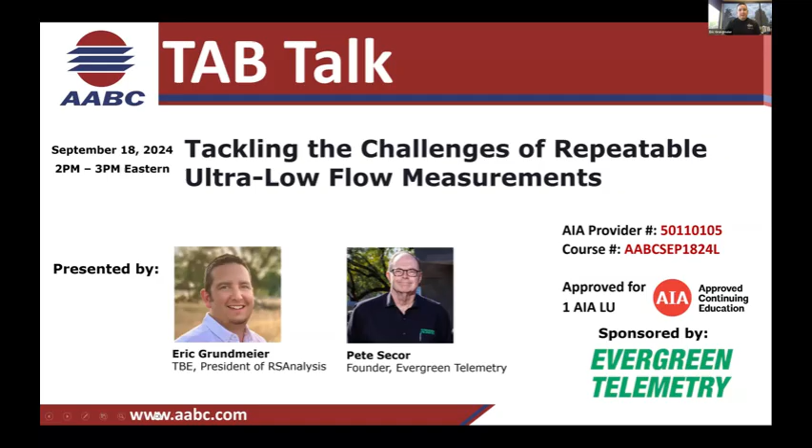We're going to be talking about measuring low flows. We're going to be going over a case study where Pete partnered with RSAnalysis as we were brought into a lawsuit or litigation between a school district and a manufacturer.

We called on Pete to help us out, and this is my first webinar. Right before this, we had a little practice session. One of the things I hear about Pete all the time is that he loves talking test and air balance, loves talking air flows and everything else. And it's true. I had an experience in New York City where we met Brian Sabean. He was the general manager of the Giants, and what a likable guy he was. He just loved talking baseball. And I say that about Pete too. He loves this industry, and it was great to get to chit chat and go over our slides together.

So one of the things that I wanted to bring up in the beginning is that testing low flows is not something new, right? That's something that has been going on in our industry. But I do think that we're seeing an increase in that request, where Pete didn't start updating his technology just because he wanted to; he's actually seeing requests in the industry. Is that right, Pete?

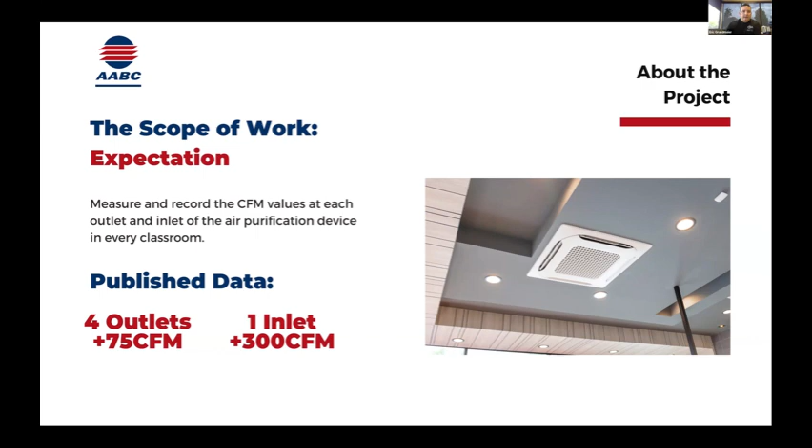So we had this device. As we got the literature back, our expectation at the onset was we were going to be reading somewhere in the realm of 75 CFM per outlet, with a total for the device of 300 CFM. They actually gave us one of these devices and we were able to do some bench testing in our lab. What we quickly realized was the reality was that we weren't getting 75 CFM per outlet. These units were not doing 300 CFM, but much less. The outlet CFMs were all below 10 CFM.

So we were going through some different iterations on how to measure this flow, and we had 600 plus diffusers to read. We created a little 4x4 plenum in which we were trying to read a pitot traverse as we taped it to the ceiling, and it just wasn't working out. So that's where we got Pete involved. He was in the midst of creating the low flow plate and was able to send somebody up here to help us out. Pete, anything you want to add there?

Yeah, it's a very, very difficult challenge when you're getting down underneath 30 CFM, and we'll talk in a minute about how we address that. But it was a very interesting project, and appreciate you calling on us. In the future slides, we'll talk about how we did it.

Yeah, and as we looked into this manufacturer's published data, even achieving this 300 CFM, you were only getting about 2 air exchanges in the classroom. I'm sure a lot of us experienced this throughout the industry during COVID, which really highlighted airflows and IAQ, that there were a lot of manufacturers coming out with all these promises. We know that 2 air exchanges is really next to nothing, and when we got down to the actual measurements, the total for the device was 15 CFM, below 1 air exchange per hour in the room. These things were just not doing much.

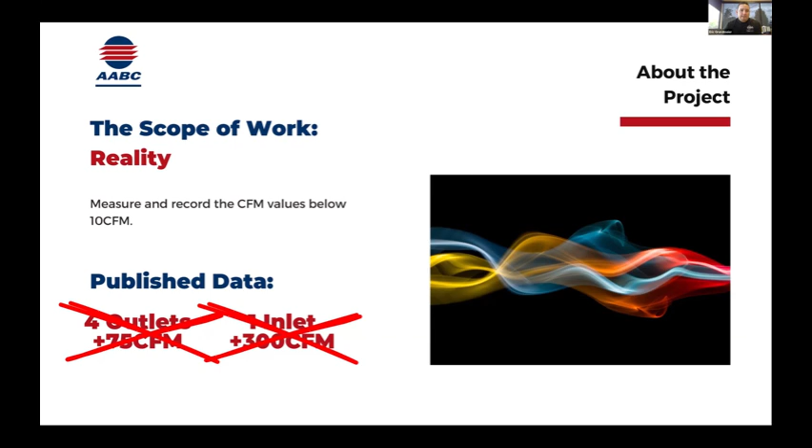So I want to talk about some of the challenges that we faced: challenges with accuracy, and equipment limitations, which Pete's going to touch on. Also environmental sensitivity, when we're asked to measure low flows on package units and outside airs, those environmental impacts, like prevailing winds, can really change how we're measuring. And the last piece of this puzzle, the one I highlighted here, was the repeatability aspect of this project.

And out of all these challenges, that's really the one that we focused in on, because we were basically in the court of law saying, here's our readings, and they have to be repeatable. And that's something across our industry that we really hang our hat on, is that our readings have to be repeatable. So we're getting into these really low flow challenges, and we needed some efficiency in measuring these as well. And that's really where Pete came into light, being able to use his hood and have some repeatability to our methods.

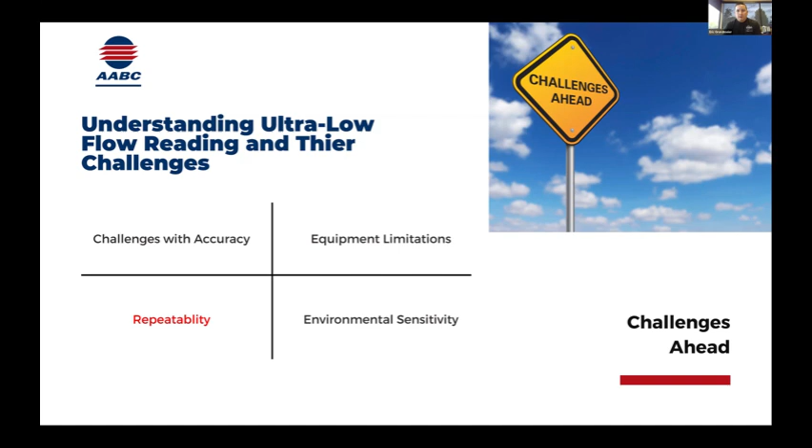And so the repeatability aspect is, we needed consistent results. We needed reliable data and credibility. So having Pete on board here really helped us with our credibility, especially with the mechanical engineer of record that we were working with. And Pete, explain to us some of the challenges with repeatability when it comes to a flow hood, velocities, velocity pressures. So our technology is pressure-based.

We're going to measure velocity based on velocity pressure. When you're talking about low flow, you're talking about low velocity. There's a certain minimum that sensor needs to see in order to get an accurate answer within a reasonable time frame. So as an example, if you're measuring with an airfoil or a pitot tube at about 100 feet a minute, you're looking at a signal that's, in terms of inches of water column, .0006 inches of water column at 100. So somewhere in the range between 75 feet a minute and 100 feet a minute is where you need to be at a minimum in order to get a reliable answer in a few seconds.

If you're lower than that, you can improve your consistency if you measure over a longer period of time. Instead of 2 seconds, try to get to 6 seconds, 8 seconds, or even average 5 readings in a row. If you do that, you'll get consistent results. But that's what you need to do in order to measure low. I've got some actual facts and figures coming in the next few slides.

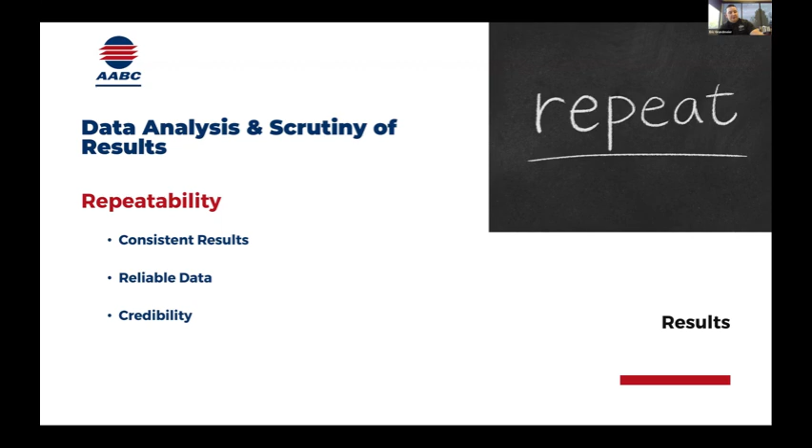Thank you. So here's an example of what Pete was talking about, guys, and this repeatability. Our first attempt with the 8-inch hood, you can see the velocity pressure at which we were trying to read at that time. We are way out there, four zeros, 7.6, trying to read this 7 CFM, and that's just with our devices, with any kind of changes in a system. I mean, this one wasn't changing much, but we do have other places where we see system changes. This one was pretty stable and we were in a stable environment, but still that's just too much for our pressure sensors to try to keep accurate and repeatable.

And then once we got the low flow plate, you can see how our velocity pressures change. So this is where I'll hand it off to Pete to explain more of what he's targeting here. Yeah, what you have to accomplish when the airflow is very, very tiny, in order to measure a minimum velocity pressure, which equates to a minimum velocity, you've got to keep the velocity up over 75 and preferably over 100 feet a minute. At 100 feet a minute, you can measure accurately and consistently in 2 seconds. At 75 feet a minute, you want to take 4 seconds, 6 seconds. You might want to go a little bit longer in order to get consistent results.

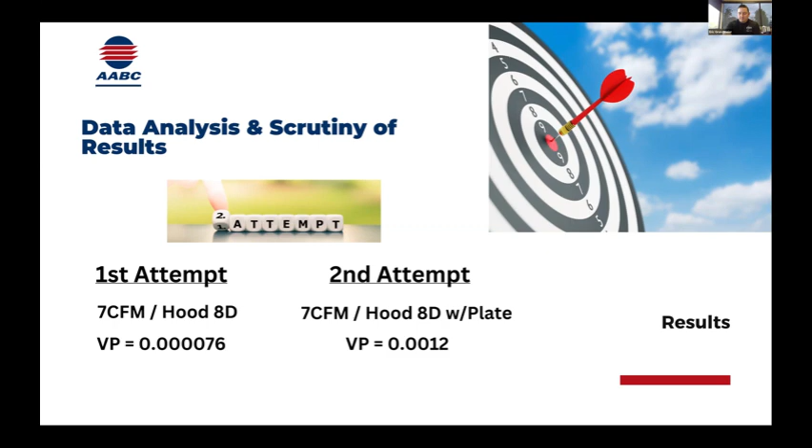Moving on, we got some information from Pete here about what he's developing in his capture hoods. Right. So obviously, CFM, cubic feet per minute, equates to the velocity in feet per minute times the effective area in square feet. So as the airflow in CFM gets lower and lower, the velocity pressure gets lower and lower. So we use a grid arm, and the ability of the grid arm to detect velocity via velocity pressure is very similar. So a lot of people are familiar with, first of all, the pitot tube.

The airfoil does a little bit better job, and the airfoil, the face velocity grid, and the measurement grids that are used in capture hoods all have about the same ability to detect velocity at a particular level relative to the velocity pressure. Foil probes create a certain velocity pressure at a given air velocity. So for instance, at 100 feet a minute for an airfoil type device, you're generating 0.0008 inches of water column. At 75 feet a minute, you're only generating 0.0005.

So the sensor that we use is working pretty hard in those cases, very hard if you're looking at 0.0005. So in order to get down to 30 CFM or 5 CFM, you're going to have to do something different. You're going to have to shrink the area involved. And Eric, if you go to the next slide,

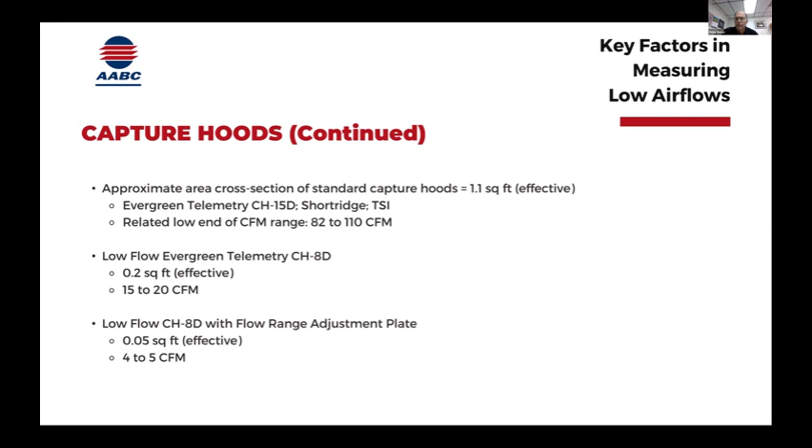Eric, if it's convenient, could you go back to the previous slide about the velocity pressure? I'll talk to that. So we're talking about the grid. There's going to be a certain velocity of air across the measurement grid. The measurement grid is going to provide a velocity pressure to the electronic sensor. Just imagine for a minute that you're at 1,000 feet a minute; you're talking about a pressure that might be 0.1 inches of water column. Certainly it's going to be above 0.01 inches of water column. Super easy to measure, and one that doesn't vary so much.

So think about what's going on in the environment where a TAB technician is doing his job: he's got the system, dampers, VAVs, people moving around in the building, doors opening and closing. When you're at 1,000 feet a minute, the signal is so strong it's relatively unaffected by everything else going on in the building. Without doing anything, in 2 seconds, you're going to get consistent results time after time. But let's imagine you're down at around 100 feet a minute or even less.

What's going on in the system is variation. That grill, you want it to be 100, you think it's 100, it's never 100 consistently. It's always doing 90 one second and 110 the next second, because it's affected by everything else. So the real world is not consistent when you're talking about 100 CFM at a particular grill. The electronics will sense that. It'll accurately tell you that one second you're at 90 feet a minute, the next second you're at 110.

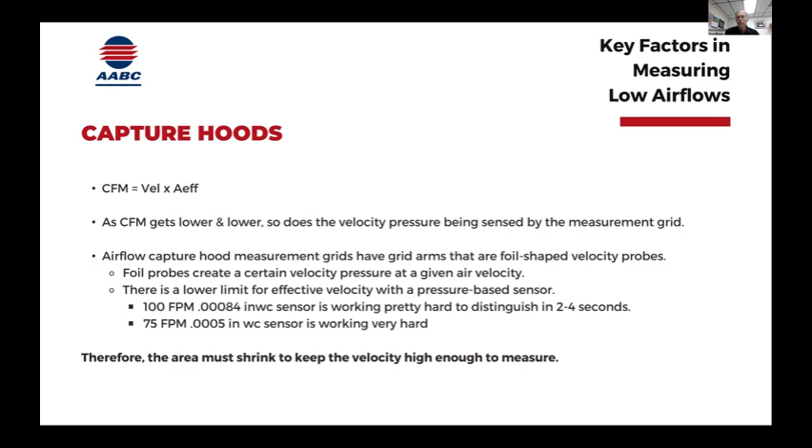And this illustrates, in our industry, having the right tool for the right job, right? Right. We're going to get into more of the application base of low flow testing, but we've all been in the scenario where you have a bunch of bathrooms all at 50 CFM, right? Having that ability to use the right tool for the right job helps you have that repeatability, that credibility that we're talking about. We can go back with that same tool, have the same measurement, which really proves the value which we bring as test and air balance.

Right. Energy efficiency, number one. And number two, a lot of dollars are being provided under the condition that the building is going to be energy efficient. So how much outside air is being brought in? How much air is being provided to a storage closet? What's the exhaust fan in a bathroom doing? More and more people are trying to be very, very accurate on tiny airflow numbers, which wasn't the case 5 years ago.

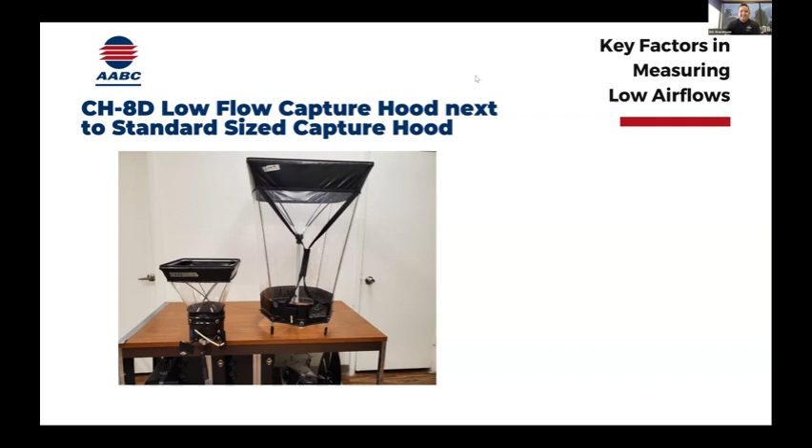But there are situations here and there where an auditor or regulatory authority or whatever wants to see a reliable reading at a very, very tiny CFM. So now, because we did it for you, Eric, we're prepared to do it for others. Back slides here. So this was the example I think you were showing, and then we have a next picture that shows this actually installed. But this is the low flow plate and the 8-inch hood, correct?

So on the left side, that's our standard low flow base with no skirt attached, with an effective cross-sectional area of 0.2 square feet. So at 100 feet a minute, it's 20 CFM. And then the plate next to it reduces that effective area down to 0.05 square feet. When I say effective area, instead of just measuring and calculating the area, what we do is we put the hood on there, and we traverse the duct, and we make sure, let's say that we're pushing 100 CFM through a particular capture hood.

And then we switch the mode over to velocity, and we measure velocity. And then we just take the 100 CFM and divide it by the measured velocity. That gives us the effective opening. Anybody out there can do the same with Shortridge or TSI or ours. You can do it on one of your test ducts. Measure 100, switch the mode to velocity, make the division per the equation there, and you'll come up with the effective area. So you're not trying to figure out what's the open space of these geometries.

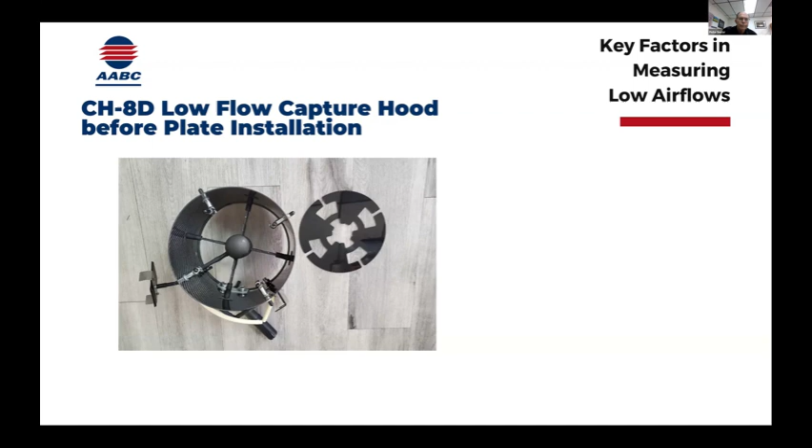We do have the installation here. Yep. So you go ahead and install that. I call it a flow adjustment plate, or flow range adjustment plate. So I'm gonna change the range from 15 CFM and up to 4 CFM and up. And you can see the little orifices there that are capturing the velocity pressure from the passing air and giving the signal over to the sensor on the side.

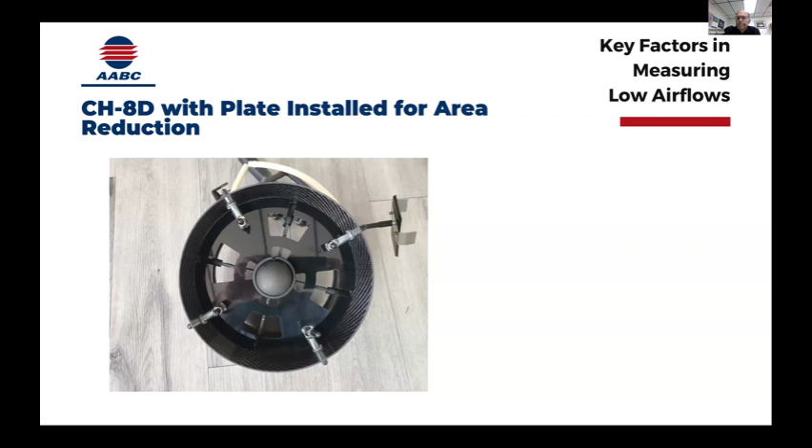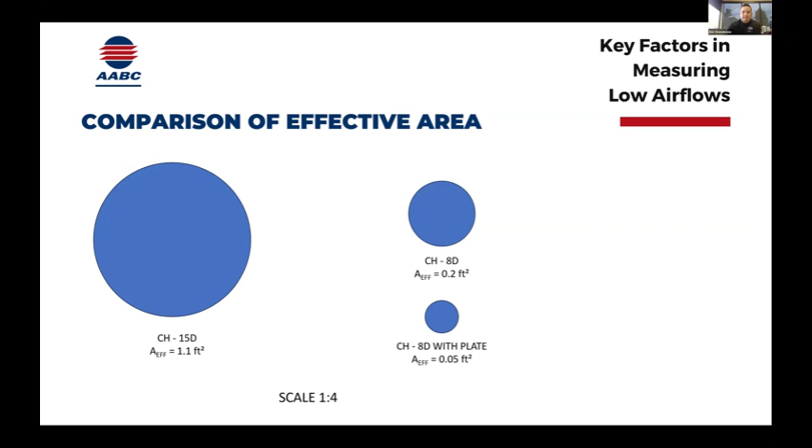Sure. So as we move, I know, Pete, you have some other applications in the residential world. It seems like we talked a little bit about that. I'll let you expand on what you're seeing there. But this was a job that we did a few years back. It was a science building, and you can see the terminal unit minimums. They were pushing the threshold of our devices all the way down to 35 CFM. That was the required minimum, 35 CFM for a terminal unit.

And we're seeing this more and more, this trend of energy conservation. How do we lower air exchanges in hospital or healthcare applications? How do we go in that direction? Because everybody is looking to be more energy efficient and conserving energy. So this isn't a specific case where we had this one job where we really had to get into the nuts and bolts of getting really low flows. I think we're seeing a trend in our industry pushing this direction where we're going to have these lower flows, and we're going to have to be repeatable. We're going to have to have credibility here.

And I think there's going to be some added discussions with the CX agents, the IORs, inspectors of record, and the MEORs about a 35 with a 10% threshold plus or minus, and with a 3 CFM, when we're going out and measuring. Those are some of the discussions I think are going to be next in our industry: where do we really need to be when we're down at these low flows? Are we still going to hold the plus or minus 10%, or is that going to expand based on the range that we're trying to measure?

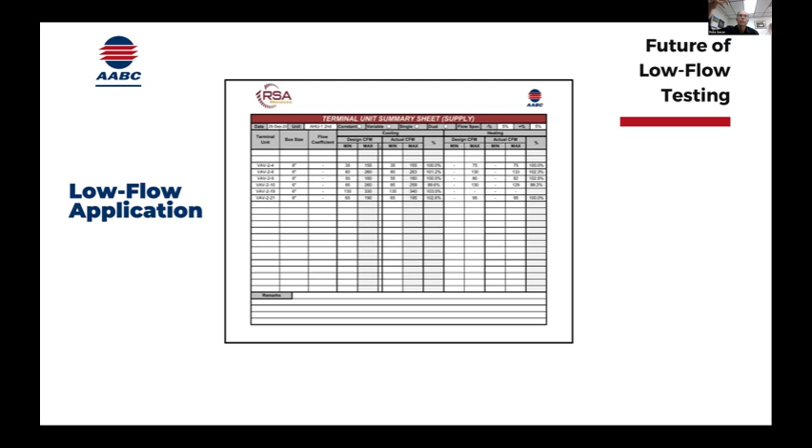The concern is about back pressure in the capture hood causing air in the system to reroute from the grille you're trying to measure and come out some other grille. So one variable is what other grilles are on the same duct system? How close are they to the grille that you're talking about? What kind of dampers are in between grille one and the other grilles?

Are those dampers relatively open so that air can easily move from one grill to another, or are those dampers relatively closed, which would represent a resistance to some molecule that wants to change its mind and go out through another grill? The other thing is about the relative pressure in the duct system.

The back pressure effect means you're going to measure too low because some air is going to go somewhere else. That effect usually happens when the pressure in the duct is at a relatively low number, like 0.05 inches of water column or less. That's relatively low. The airflow capture hood represents an additional resistance over what's usually there, so I'm going to introduce a little bit of resistance.

But if the pressure in the duct system is relatively high, 0.1, 0.2, then the addition of a capture hood represents an insignificant amount of additional resistance to airflow. That pressure of 0.1 or 0.2 can just blast through that capture hood like it's not even there. So there's effectively no back pressure effect in that kind of a situation. So you kind of need to know what's going on.